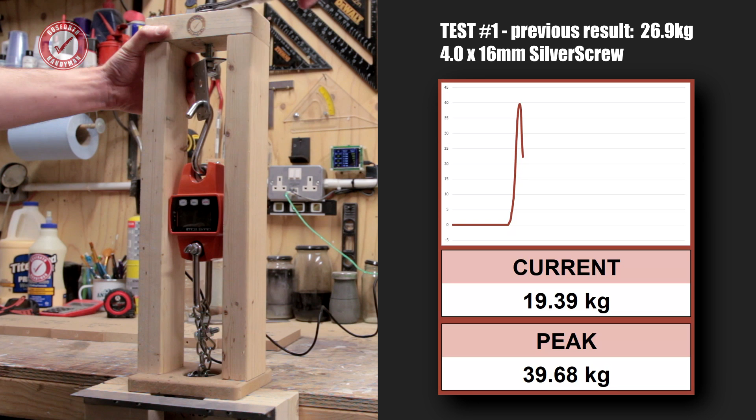Hooky dooky, test number 3. Right, this is the one I'm most intrigued about - the TurboGold 4.5x45mm, Posi drive head. Last time we got the best result of all the normal screws - we got up to 157.6 kilos. Let's see how it does this time with the pilot hole.

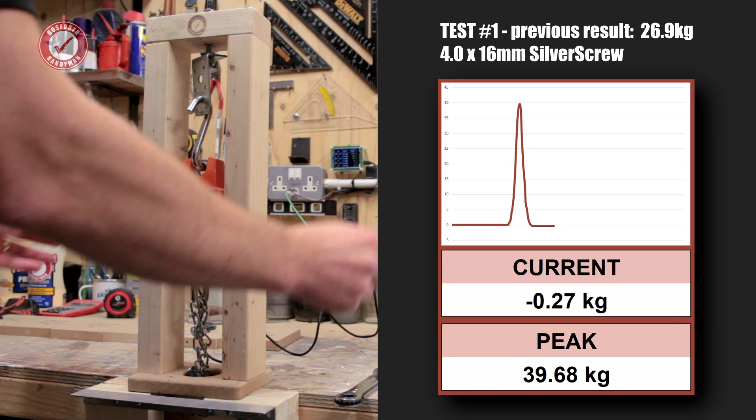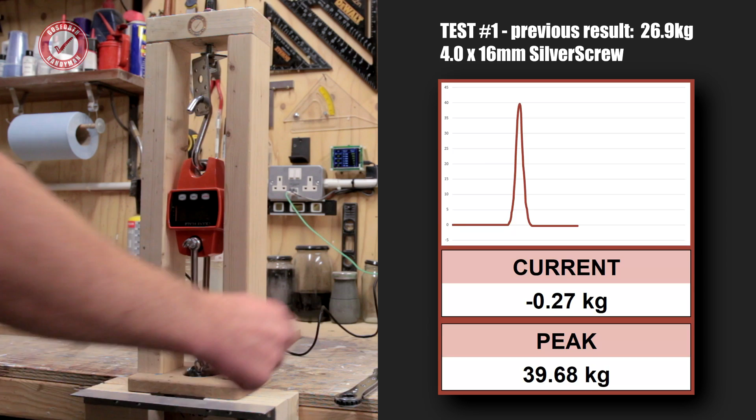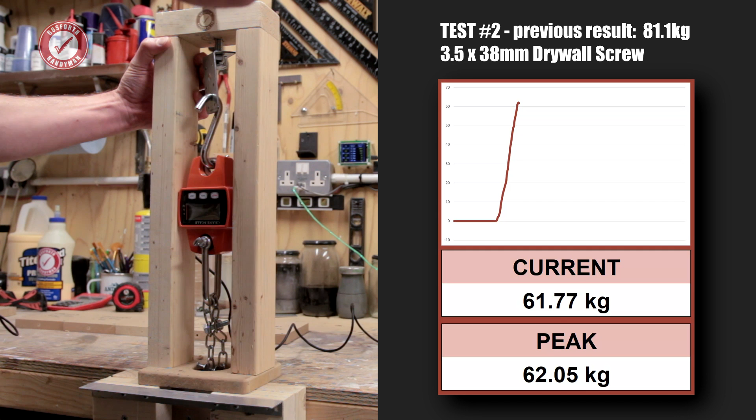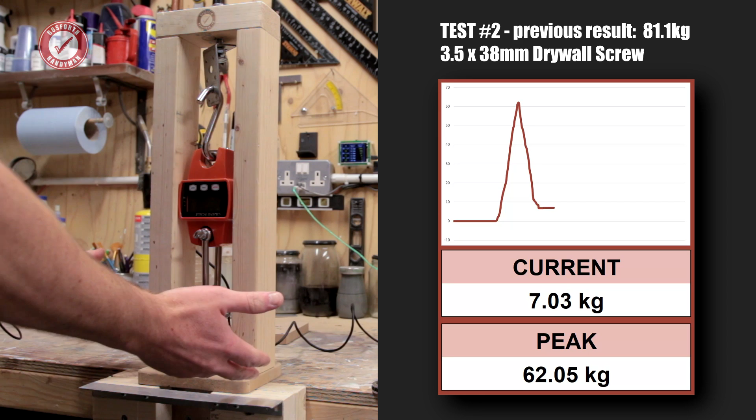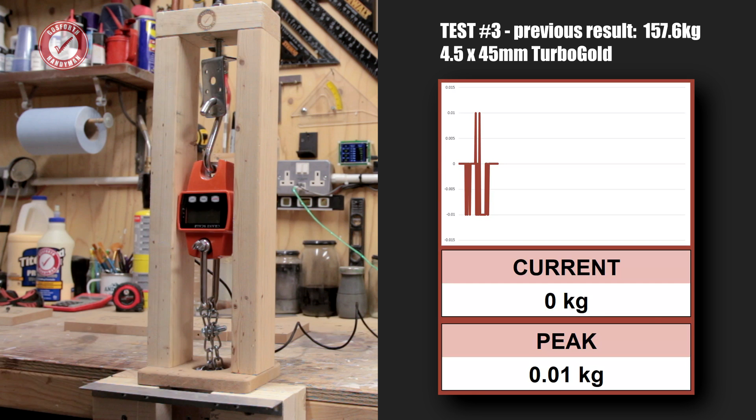On to the next one. Right, test number 4 - this is the 4x50 gold screw, Posi drive head again on it. Last time this got up to 122.4 kilos. Let's see how it does this time. That's it gone - 120.31. Very, very close to the last result. You might as well say zero difference there.

Okie doke, right, test number 5. This is a Spax Specialist MDF screw, 4x50mm Torx head on it. Last time this one got up to 130.43 kilos. Let's see how it does this time. Gone, 99. 99, and it split the MDF as well. So even with the pilot hole, it's still got - I'll show you, bloody screw's jammed. You can see the big split running all the way from about there, all the way along to about there. As I say, it didn't split going in, only split when the pull-out test was running.

Right, Confirmat screw. Last time this got up to the ridiculous 228.71 kilos. Someone rightly pointed out in the comments that the shoulder or neck of the screw just below the head is a little bit wider than the rest of the thread, so I've added a spacer just to compensate for that. Let's go for it and see what this goes up to. So we're now on a 5mm pilot hole instead of the 4mm, and we've got this spacer to account for the wider shank, or collar, of the screw. There's been no splitting this time of the screw going in, which is a better sign than before. 228.7 to beat.

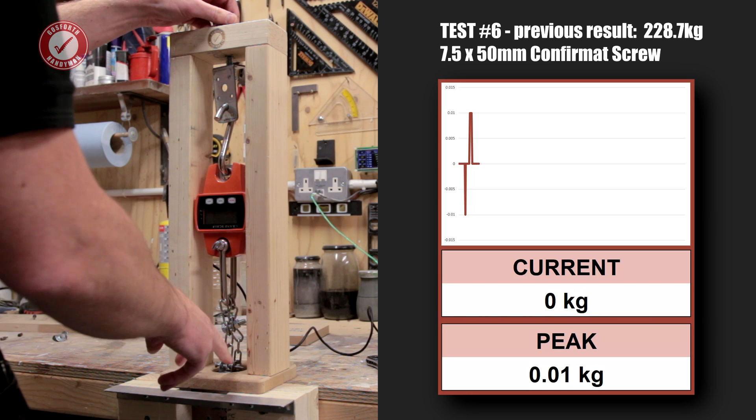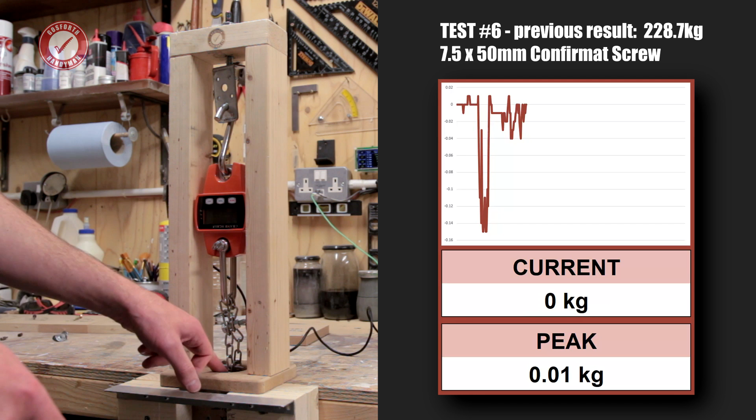So you can see the spacer that I used there, and you can see the giant split running all the way down. So this is an interesting one. It might have got the lower result because of the spacer and the fact that there's less thread now in the MDF. I'll run this a couple more times to check whether it's the spacer to blame, or if it's just something to do with the bigger pilot hole. Remember, we had the 4mm pilot hole last time, this time it had the 5mm pilot hole. But either way, it didn't split going in, but split coming out, and still did amazingly well, but not as well as last time.

Right, final test. This is the long drywall screw, the 4x62 Phillips head drywall screw. Last time it got up to 145 kilos or thereabouts. Let's see how we do this time with the pilot hole. I think that's it, gone at 162. Well and truly gone. Good result, but bear in mind this is a much longer screw than the other ones, and it really split the wood on this one.

Right, so time for us to run a couple of these tests again, and then we'll go through the results.

Okay, so I have before me here the results of the tests, and it's quite full on, I'm afraid. Things got a little bit complicated, and to cut a long story short, I had to run the test 40 times, and I've actually ended up adding an 8th test into the mix, and that is the TurboGold 4x50mm screws.

They weren't included as part of last week's test, but I will explain why I've added them in a bit. I know a lot of you just want me to cut to the chase and tell you which screw to use, which is fine, but I know a lot of you also want to know a bit more of the science behind it and how I got to my conclusions. So what I'm going to do is tell you now what I think are the best screws to use, and then if you're interested, I'll take you through my full analysis of the results so you can see how I got to that conclusion.

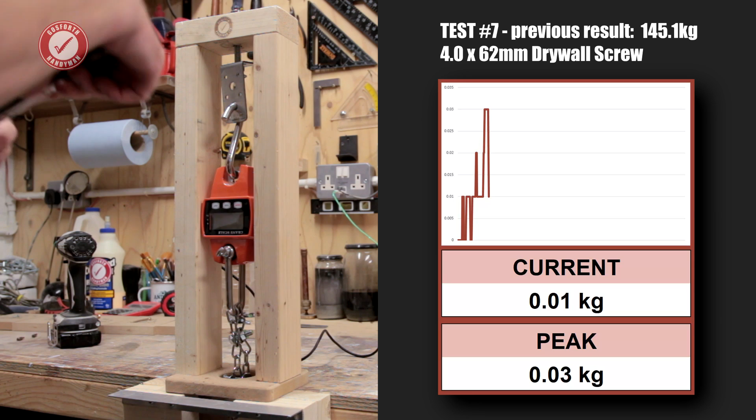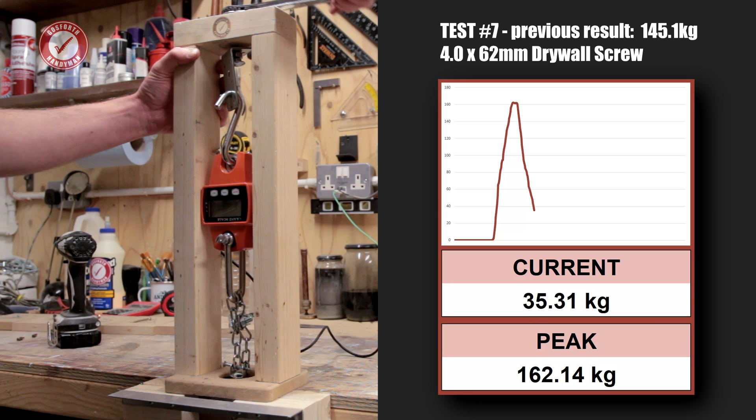In my humble opinion, if you're screwing into the edge grain of MDF, I would suggest you go for the TurboGold 4x50mm screw as a good general purpose everyday screw that'll cover you for the vast majority of situations you're going to run into. Now, it's completely up to you.

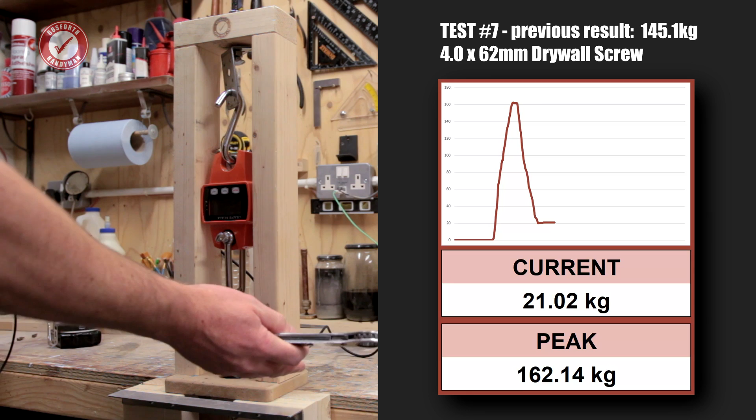I think using a pilot hole is pointless. The TurboGold screws have a self-drilling tip on them and a rifled shank, so they're drilling their way into the MDF anyway. And although the results with the pilot hole were better than without, they were still staggeringly high results. So I just don't see a situation where you're going to need that kind of loading on a single screw. And if you do want something more beefy than the results we're getting from the 4x50, then I would suggest going for the Conformat screw with a 5mm pilot hole.

So that's my takeaway from all of this. TurboGold 4x50 for general purpose stuff, Conformat screw for anything, especially if you're getting into flat pack stuff that you might have to take apart and put back together. And if you wanted it to be a bit more beefy than the TurboGold, the Conformat's probably your route to go down. But honestly, for me, 99% of situations are now going to be more than covered off by the TurboGold 4x50. Remember as well, this is just my humble opinion.

If you've got screws that you're happy using and you're comfortable with them, continue doing what you're doing. All of them performed amazingly well. Anyway, let me explain how I got to my conclusion.

Okay, so we've got a lot of results here, 40 separate tests that I've had to run. And we need to simplify this a bit, otherwise it's not going to make any sense to anyone, including myself. So effectively, we've got two sets of tests: a set of tests that we've run with no pilot hole, and a set of tests that we've run with a pilot hole.

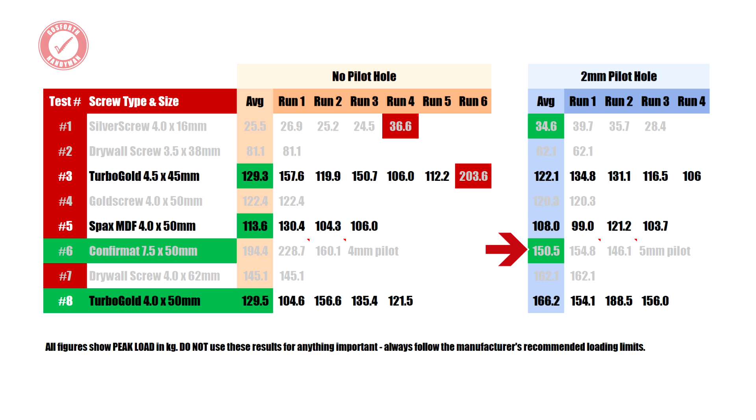Just to simplify matters a little to start off with, we're going to take some of these out of the equation so we don't have to worry about them anymore, because it's just cluttering things and making things more complicated than it needs to be. So we're going to take out the drywall screw test for the 3.5x38. You can see the one with no pilot hole did better than the one with a pilot hole. Whether or not it would have averaged out a little more if we'd run the test a few more times, it's anyone's guess, but it's not a screw I would generally use.

I know a lot of people do use it, which is why I included it in the test, but there's only so many tests that can run. So this is going to get excluded for now.

The other one we're going to exclude is this drywall screw. Again, we've got a pretty good result with a 2mm pilot hole. On this test, the piloted screw did better than the non-piloted screw by quite a way, but I only ran the test once. It's a much longer screw anyway, so of course it's going to do better because it's a longer screw. It's just not a screw I would use. If it's a screw you would use, you can do your own tests, but I'm just not including that. I need to simplify things down a little bit.

The other one I'm going to rule out is the gold screw. You can see it was coming out at about 120 on both tests, so whether or not it had a pilot hole made very little difference. Maybe if I'd run the test a few more times you would have seen a bigger difference, but the key thing is it's a worse result than the TurboGold. One of the main reasons I included the gold screw is that it doesn't have the self-drilling tip, and I wasn't sure if that would affect the results positively or negatively. The answer is it's affected it nominally in a negative way, but comparing it between the TurboGold and the gold screw, not a huge difference. So we're just going to ignore that one as well.

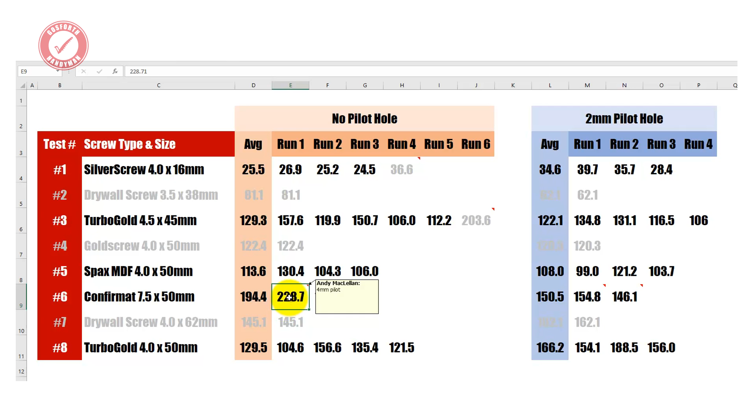So personally, if you're using a Conformat, I would use - let me just grey that out so we know we're forgetting about it - but I would put a little green thing on it, just so you know this is the one I would go for. So the 5mm pilot hole. Let me just write it here so we don't forget: 5mm pilot.

And here is the 4mm pilot. Okie doke. So the other one we're going to ignore is the silver screw, because you would never generally use a tiny little short screw like that into the edge grain of MDF.

What we have interestingly shown here, I did run the test 3 times on each. I actually ran it a 4th time, and I'll talk about that in a minute, but I'm not including that 4th run on the no pilot hole in the average. You'll see my average calculation there is just taking into account runs 1, 2 and 3. We can see that with the pilot hole, it did nominally better than without.

The point is that it did terribly compared to going into the face grain. That was the only reason for including this screw in the test, just to show you what a big difference it makes going into edge grain versus face grain, and why you need a much beefier screw going into the edge grain of MDF. If you are going to use a really short screw into the edge grain of MDF, which I'm not sure why you would, but if you are, I'd suggest using a pilot hole. So here's our green little blob for that.

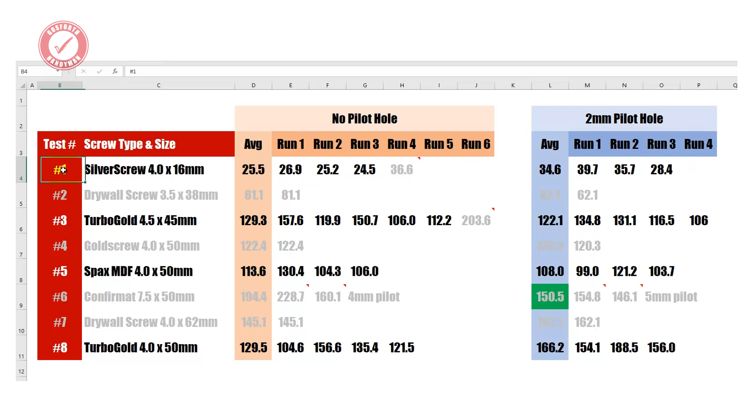I was like, what's going on there? So I tested it again, and we got 112. Okay, I can't explain that. It could be so many different factors at play here, but basically I've run the test 5 times here. This one I'm going to talk about in a second, that's not included in the average. Again, the average is between these 5 results here.

What we've got here, I don't know, it could be down to imperfections or inconsistencies within the MDF itself. It could be me using a different amount of torque to screw the screw in. There's so many different factors, it could be humidity. The point is, I don't think any of these results can be dismissed, and all I've done is taken an average of all of them. We've got a range from 106 to 157 here, coming out at an average of 129 kilos. It's still a crazy amount of load on a single screw, not something you're ever going to really run into in the real world.

But if you are going to use a TurboGold 4.5 by 45mm screw, this is the average of what I got when I didn't use a pilot hole. Now, interestingly, when I did use a pilot hole, 2mm pilot, here's the results I got. Again, quite a broad range, all the way from 106, which is pretty much what we saw over with no pilot, but we didn't get anywhere near as high as the figures with no pilot hole.

So when we take the average of these 4 runs, let me just show you. We're averaging between those 4, coming out at 122.1. So we're actually slightly lower with the pilot hole. So if you're going to use a 4.5 by 45 screw into MDF, it seems to do better with no pilot. So little green blobs going to go on this one.

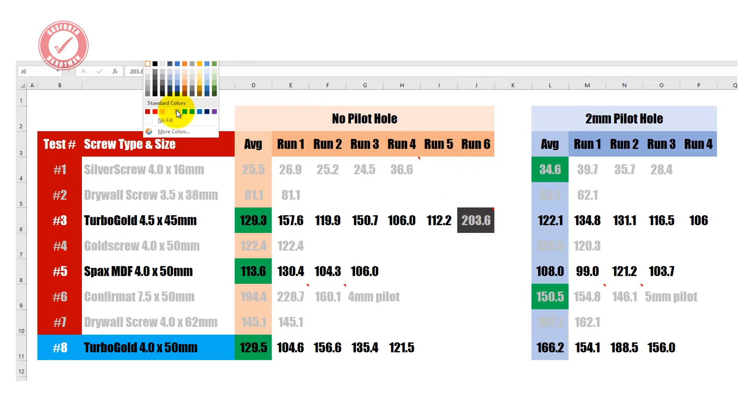Maybe it's just a Medite MR where you happen to be able to get a better screw loading in the edge grain of the MDF. We're getting to the nth degree of testing here. I don't want too many variables in this, so this was just a little bit of fun really.

And then I thought, well, if I'm going to try that test for the moisture resistant, let's try our silver screw, the first test we did. Let's also try that in the Medite MR and look at that. 36.6. We got better than anything we've done other than this 2mm pilot hole test where we got 39.7, but still better than the average on the pilot hole test.

So I need to think of a conclusion to come up with here, and I would say, okay, silver screw, you're not going to be doing anything with in the edge grain of MDF, so we can kind of ignore that. Drywall screw, I've already said we're ignoring. The 4.5 by 45, I would say don't use that and use the 4 by 50 instead, because we're getting a very similar result but less cracking of the MDF.

Gold screw, nah, not to write home about really. I would stick to the TurboGold with the self-drilling tip on it. It seems to get a much better result. The Spax, for me, isn't worth the hassle. The Conformat are great. If you are going to do it, I would do it with the 5mm pilot. So, although we've kind of ruled that out from the test, I am going to include that as one of our winners. Drywall screw we've ruled out.

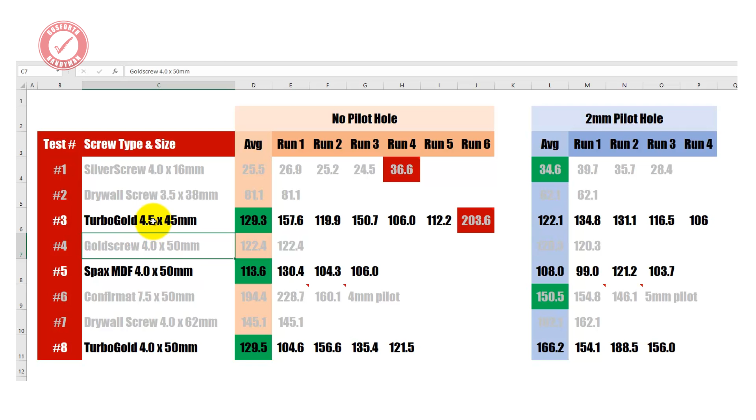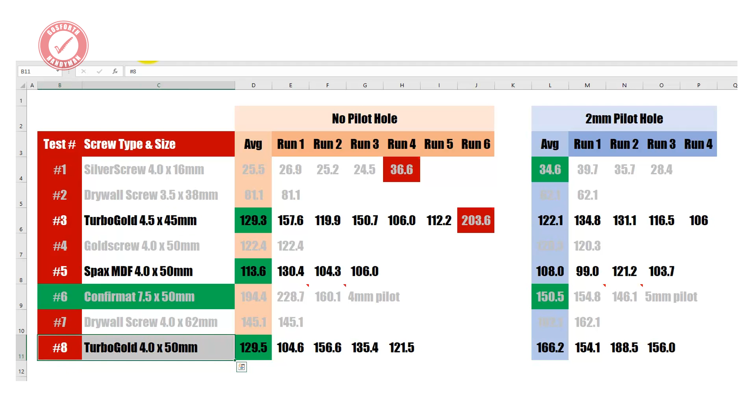Also, a couple of you mentioned that screws in MDF are generally subject more to shear loads rather than pull-out loads. I completely agree. The reason we're doing pull-out tests is because it's about the only test that you can do that's a repeatable test that can be directly compared against other types of fittings. Shear load tests introduce a whole load of other factors, like how much glue you use in the joint, how big the joint is, how many screws you use, whether you've got biscuits or dominoes in the joint as well. There's so many other variables that come into play on a shear load test that, for the purposes of this particular test, I just wanted to get a direct strength comparison of pull forces.

We'll cover off shear loads on a separate video. If I introduce too many variables into this particular test, the results are going to become completely meaningless.

Remember, as usual, don't go off my results for anything important that you're doing. This is just a bit of fun. Always go by the manufacturer's guidelines. I'm only talking about peak loads here. I haven't taken any safety factors into account. It's very normal to use a safety factor of 3 or 4, sometimes as high as 7. So with a safety factor of 7, a 130 kilo load comes down to about 20 kilos.